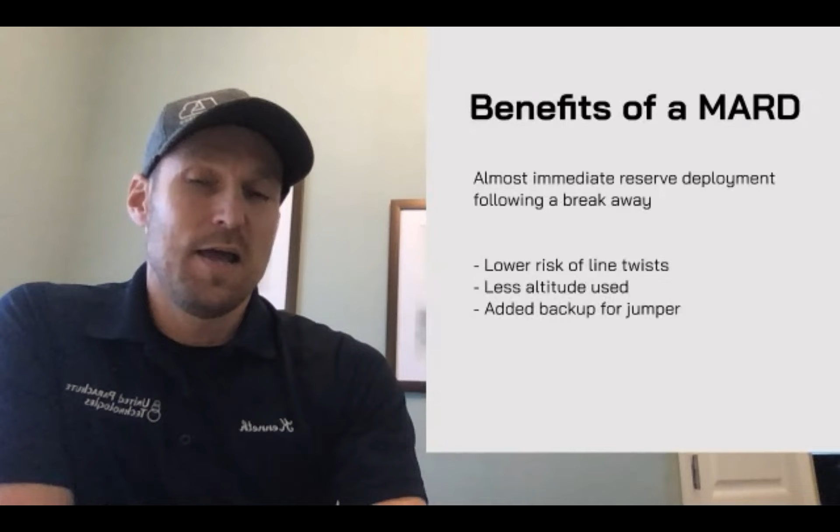With the TSO certification that we use within the FAA in the US, like I mentioned before, we have about 3 seconds or 300 feet to get that reserve out. And that's in any given situation. That can be from a terminal ride, or that can be from after a breakaway. With the MARD system, it has been shown that we're reducing this down to less than a second and less than 100 feet. Now that's a lot of give on a situation like this. It can be a massive difference.

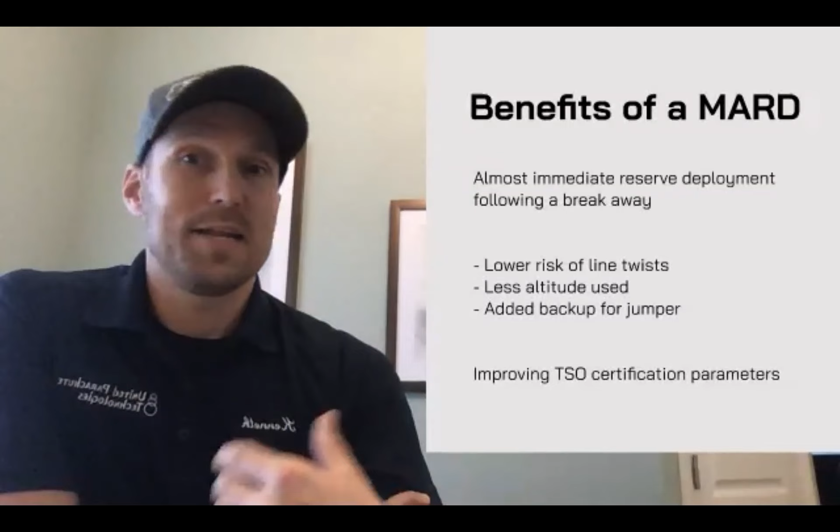Obviously, we always expect people to do their procedures, follow their altitudes. But if things get out of hand, we get a little bit of tunnel vision, we get a little bit low, that's going to make a big difference on the altitude.

The types of MARDs that are out there, there are quite a variety now. UPT introduced the very first MARD as part of the Sigma system back in 2003. The Sigma had been out on the market about 2 years before the Skyhook got introduced as a mandatory part of the system. Before that, there was a lot of development, and we'll get back to that in a second.

Now, there are other manufacturers out there that currently use the Skyhook itself. They're licensed by UPT to use the Skyhook. There are other manufacturers as well that have created their own designs and came out on the market. They have various names, and they're all great systems that have been thoroughly tested.

When we talk a little bit about MARDs on our end, we talk about passive and active MARDs. So a passive MARD would be something that is in your container, not actively put together from the main through the RSL to the bridle. So it can be something that attaches later, at any given time during the breakaway and emergency procedure process. Active MARDs are the ones that are already attached, where it will almost be the opposite. There would have to be a reaction to get it released again.

Now, the Skyhook is an active MARD. The Skyhook is put in and put together with the lanyard during the reserve packing. There are others that are not, where the bridle and the MARD system are completely independent. So the Skyhook itself, we have a picture of it here. That's kind of how the name came about. It's a small hook that's been sewn onto the reserve bridle.

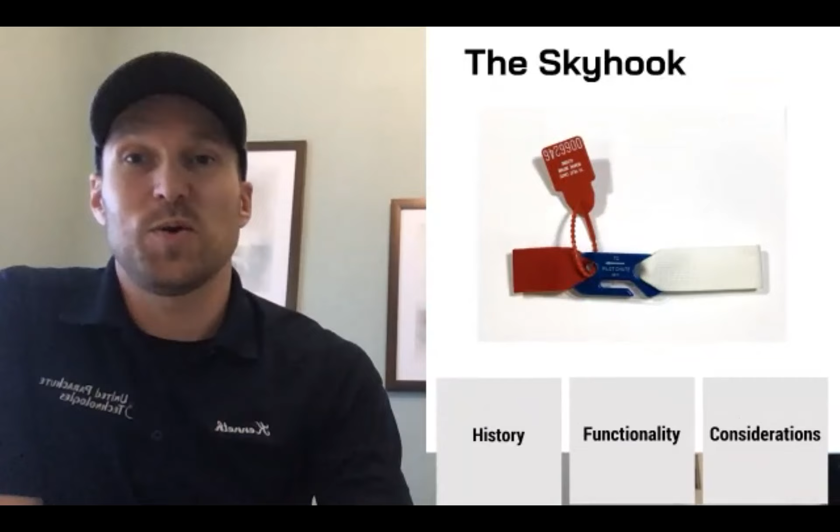It connects via a lanyard. We have a black lanyard that comes from the main parachute, a white lanyard down to the pin, and a red lanyard that goes to the Skyhook. That red lanyard is an interesting point we'll get back to a little later.

That is the connecting point that creates the MARD connection for the Skyhook. It was invented by Bill Booth. I said earlier that we introduced it around 2003, but it was something Bill worked on for many years before that, probably 15 to 20 years before it even came to fruition. There were a lot of obstacles to get over, a lot of challenges that had to be solved before he could really start putting this into a testing phase in the end of the 90s.

The biggest obstacle was solved by something we call the Collins lanyard principle, or the Collins lanyard concept, which in short ensures that if you ever have one riser leave before the other—whether from a failure or from misrigging—you never have half a canopy attached to your container and harness system with the MARD starting to activate.

The Skyhook itself was originally developed for the tandem systems, because during emergency procedures for tandem systems we would see instructors using more time than on sport container systems. We allow a little bit more because it's a heavier, bigger system. We have up to about 5 seconds before we have to have a reserve out.

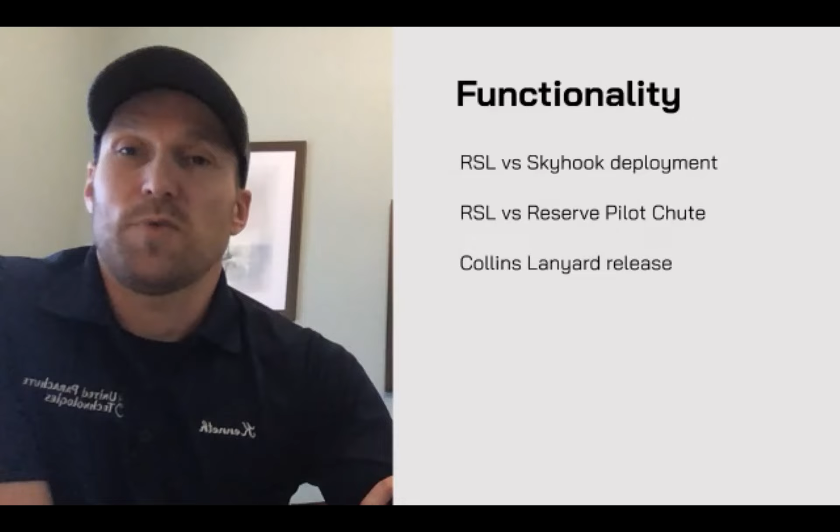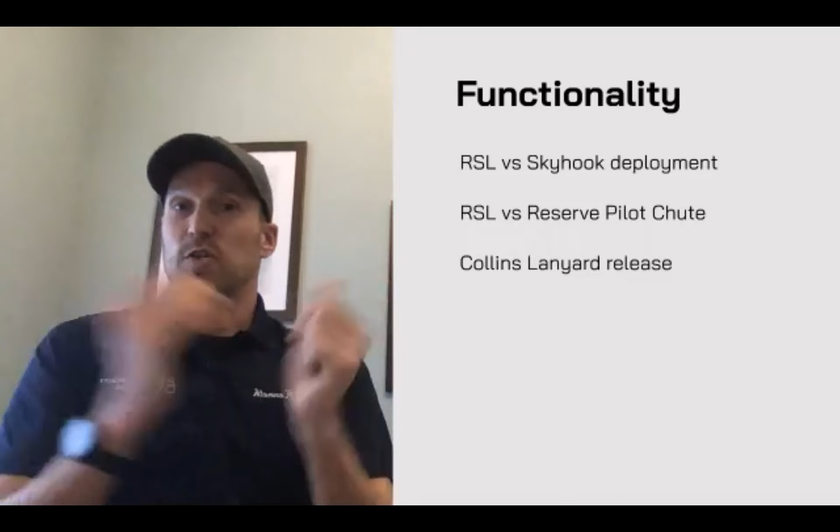So to solve this issue, to solve this problem, the Collins lanyard was developed. It is a small connection on the RSL lanyard itself, where the breakaway cable to the opposite riser routes through. So that means if the RSL side, for whatever reason, breaks—any type of failure, misrigging or so, maybe a pull on incorrectly adjusted breakaway cables—if that releases, the non-RSL side will also release. It'll be illustrated here in this video.

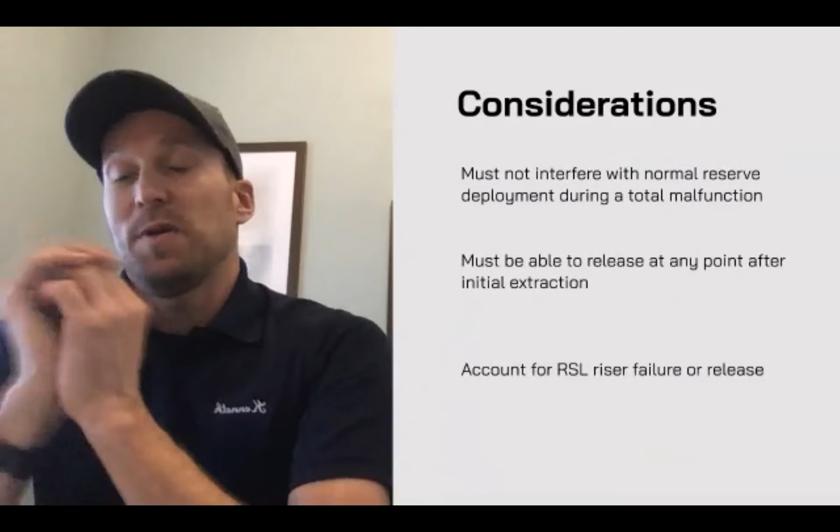Then we're going to talk a little bit about the considerations, because obviously any idea is great. If we have a new development that we want to pursue, you have to take into account all the considerations—what about this situation? What about this situation? What about this situation?

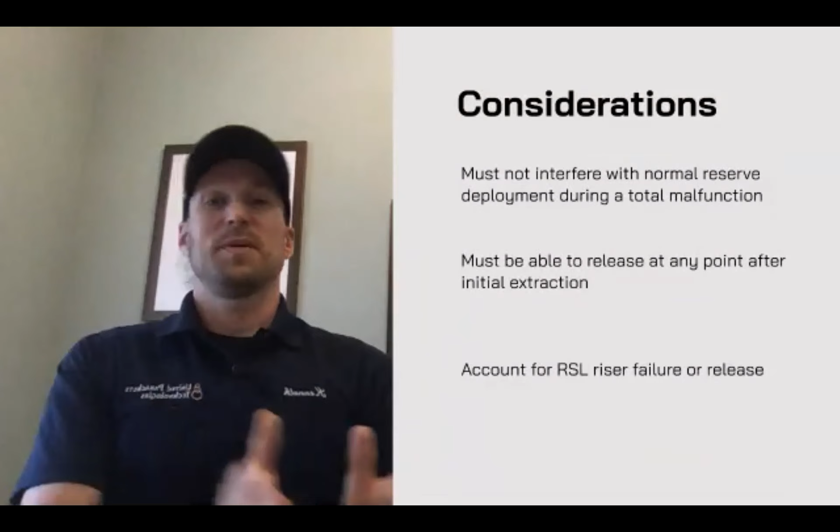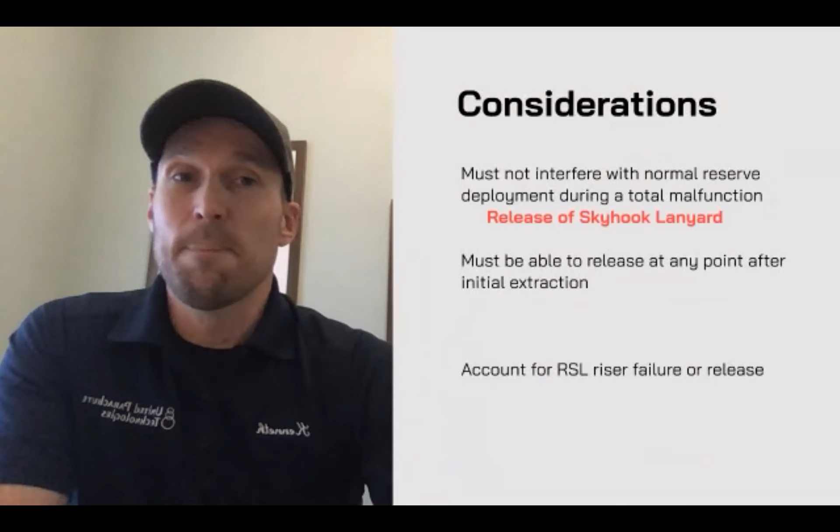So what we have is, we don't want the Skyhook to interfere with any normal reserve deployment during a total malfunction. Well, that's what we just illustrated—we had the release of the Skyhook lanyard in case the pilot chute starts pulling on a total malfunction. It'll simply just sit back in the container. The lanyard will still be in the container, and so will the main risers, because we have a total.

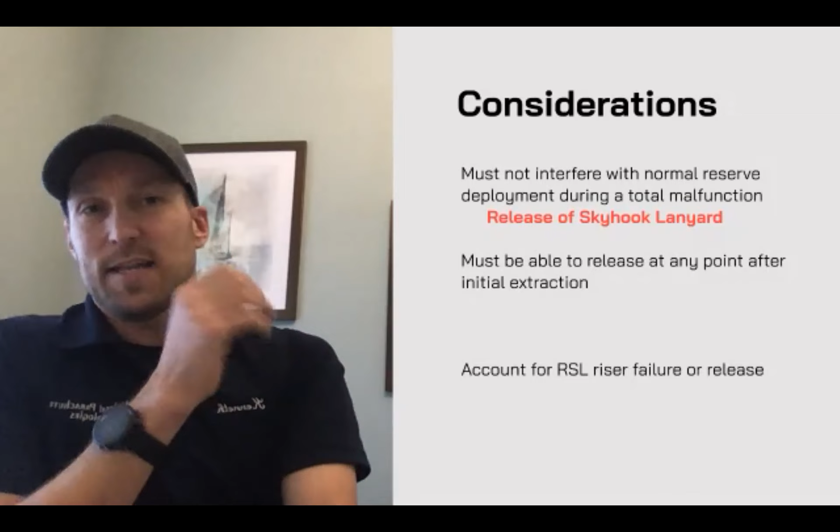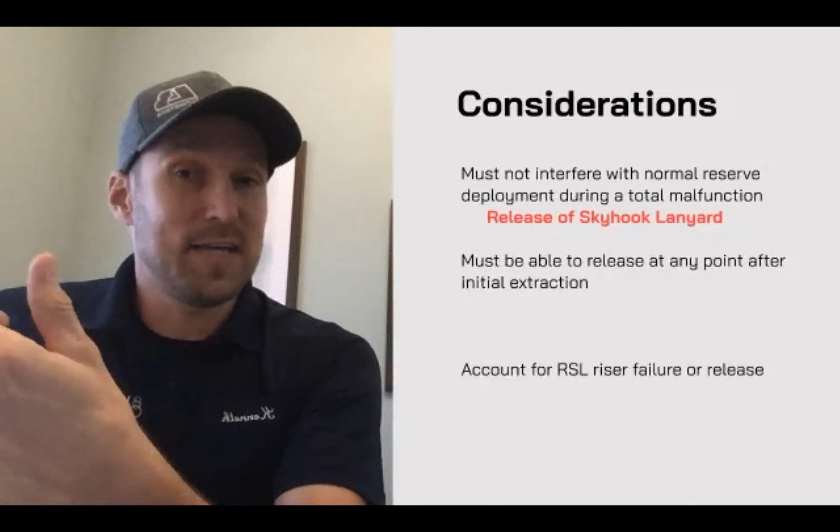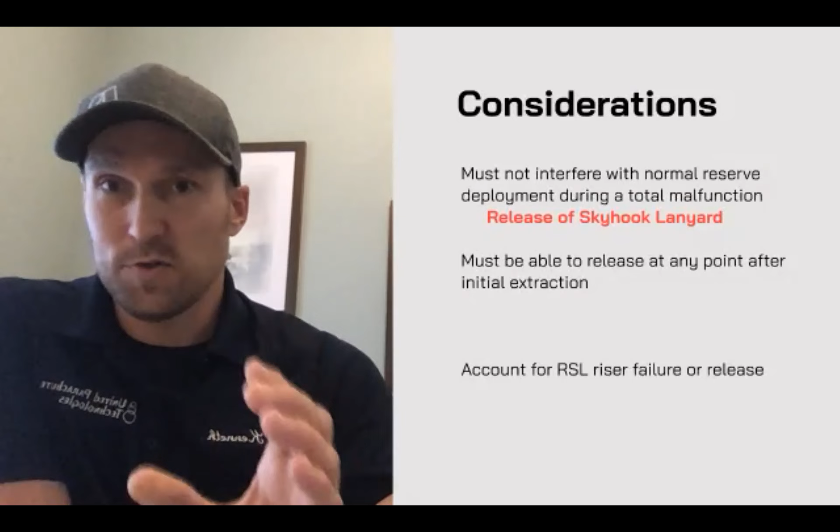Then it also needs to be able to release at any point after the initial extraction. Reason being, we don't know what happens after you break away—what if there's a misrouting or something, what if you're tumbling at the time through your lines? It could be that we have a partial canopy out, maybe even a bag-lock that doesn't create a lot of drag. A lot of things can happen up there. So we want to make sure that if at any point there's more force coming from the pilot chute itself, the reserve pilot chute takes over and continues extracting the reserve canopy.

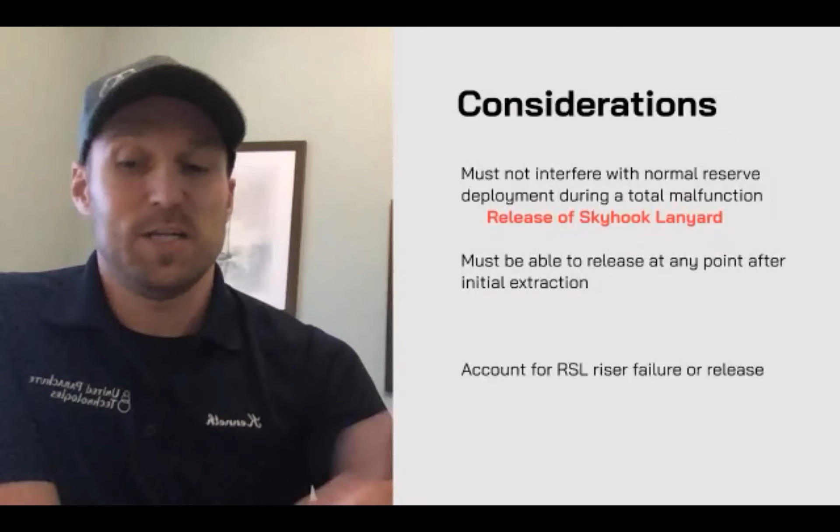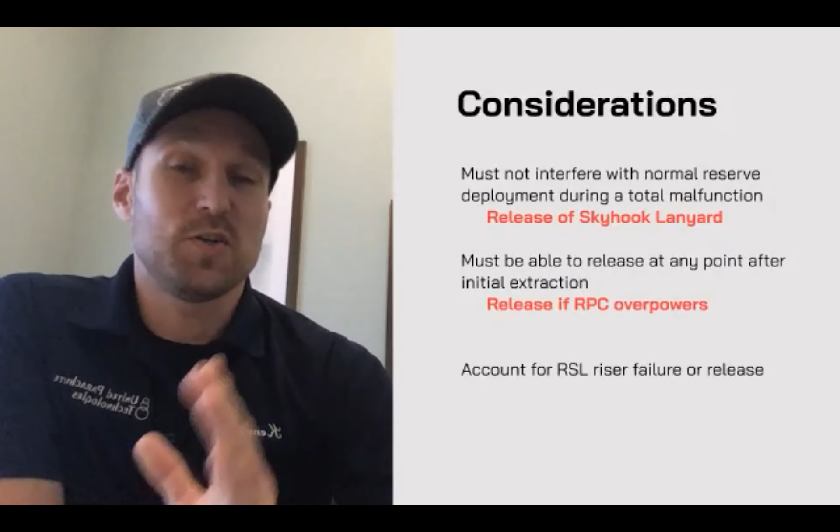We don't want the Skyhook, even after initial extraction, even after the initial load, to ever be a hindrance in that. That's what we saw as well when the lanyard slid off—that can happen at any point. Whichever side has the most power is going to continue deploying the reserve.

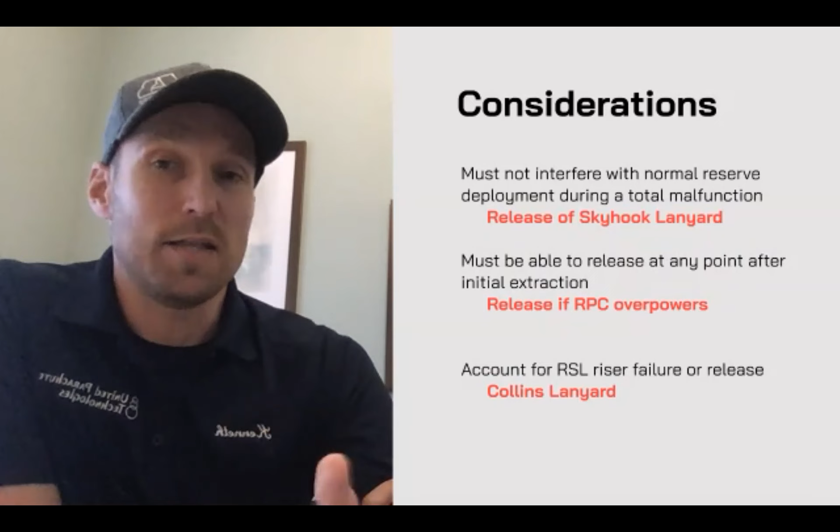Then we need to account for the RSL riser failures and releases, and that's what we just saw with the Collins lanyard—the Collins lanyard is solving that. That's what Bill was really fiddling with for a long time, and we had an engineer named Collins that basically came up with this, and he was fortunate enough to get it named after him.

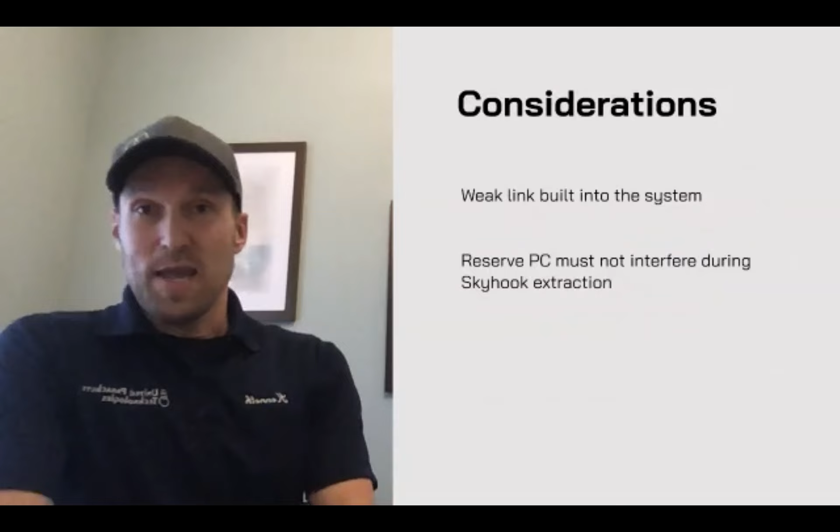Then we also need to make sure that we have a weak link built into the system. Again, if we have a horseshoe malfunction, or if the slight chance happens that we have, say, a bag-lock—so we have no canopy out, nothing to really slow us down, we're going full terminal speed—we do our emergency procedures, and right as we have broken away, that canopy comes out of the bag.

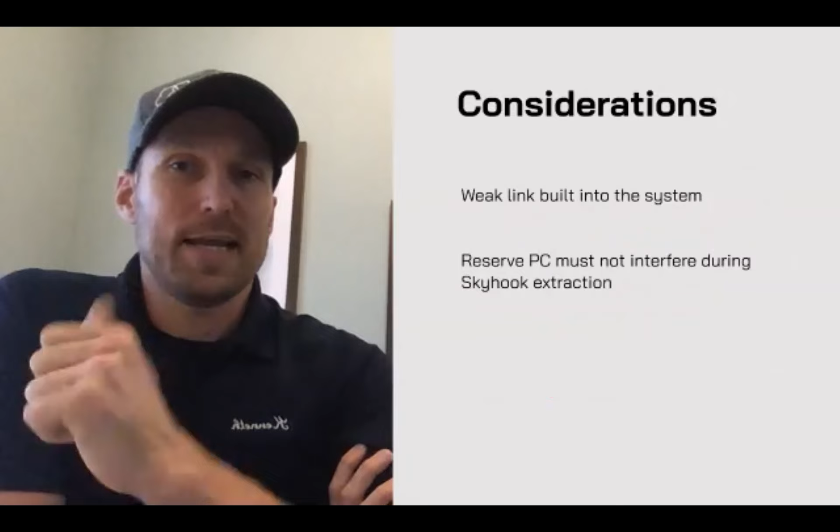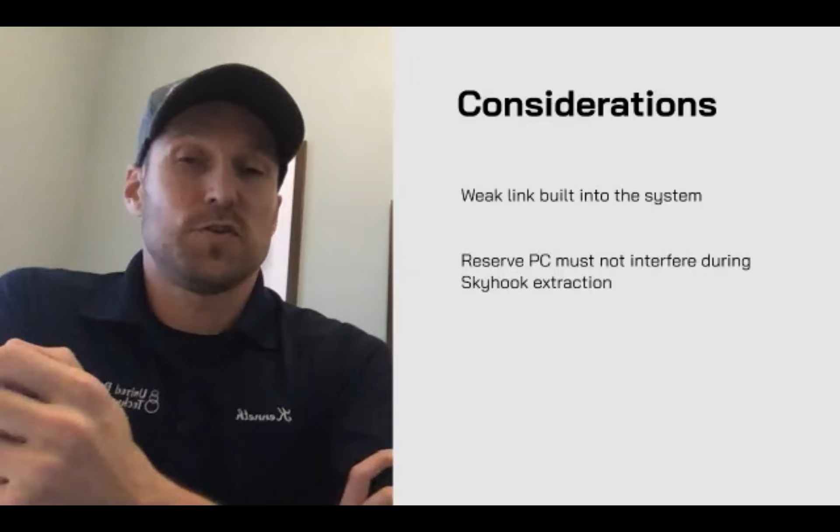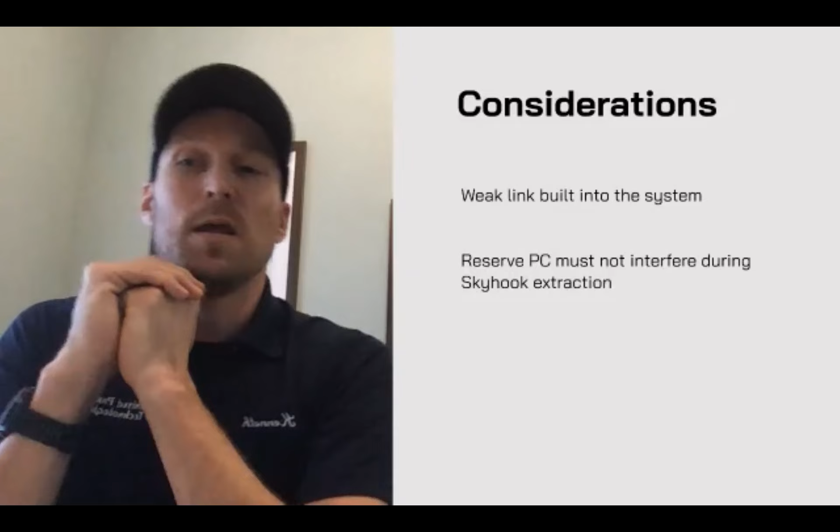Now, the main is going to transfer the opening shock through the MARD system onto the connection, essentially whipping out the reserve bag. We don't want to risk that, because even with the current designs, if the safety stow fails, or if the safety stow slides off because there's so much force on there, then we could essentially leave the canopy bag in the container. We don't want to risk that.

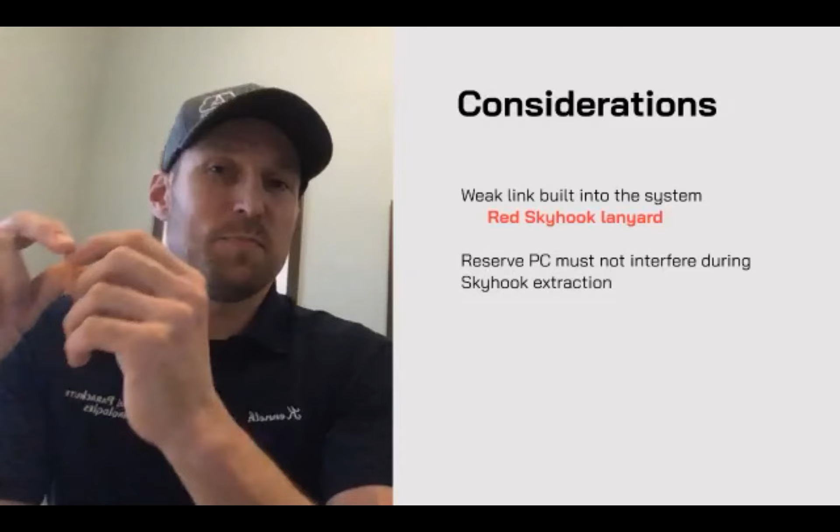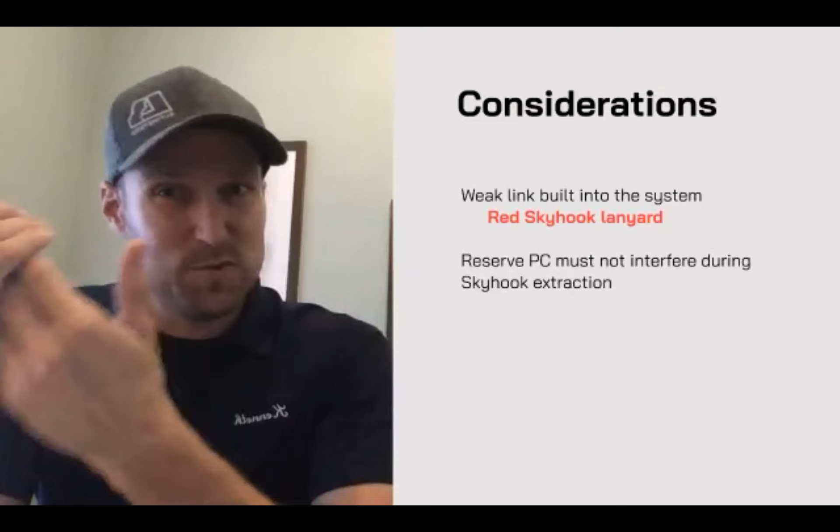So there's a weak link built into the system, and that is the red Skyhook lanyard. It's made out of a specific material that fails around 250, 300 pounds. That's not a lot when you think about opening shocks—that's actually a fairly low one. So that's why we've seen red Skyhook lanyards that would break, and that is per design. If they get overloaded, they can break.

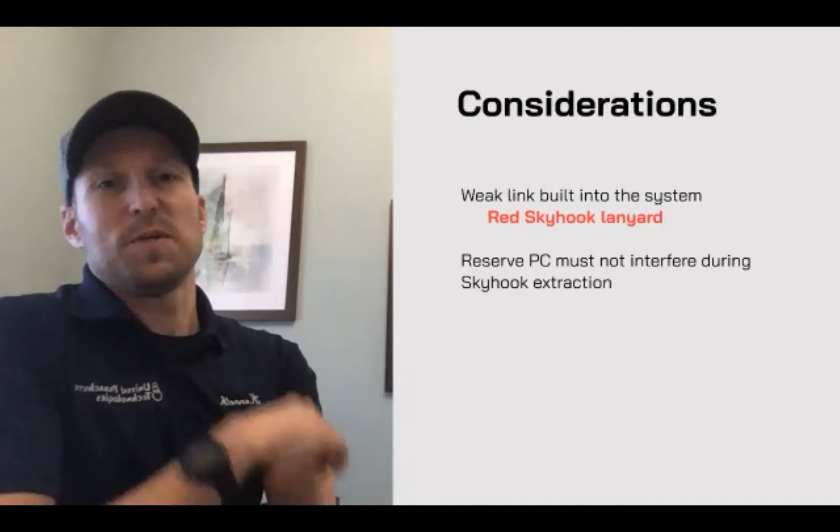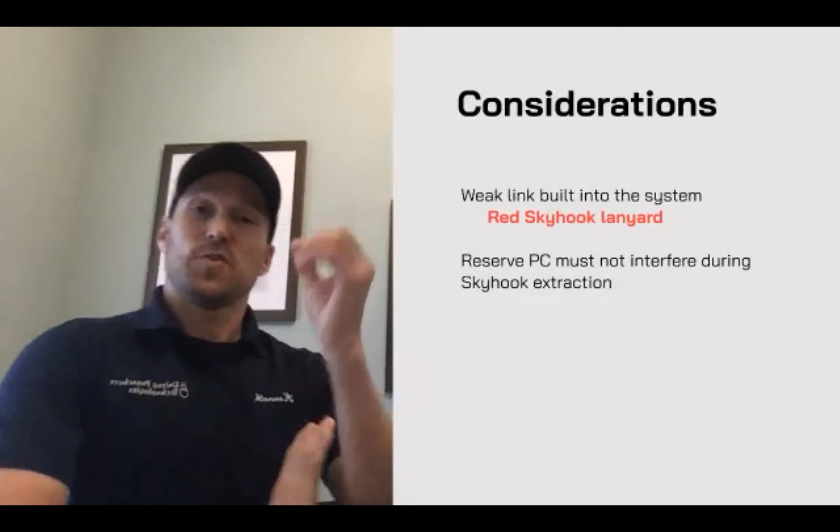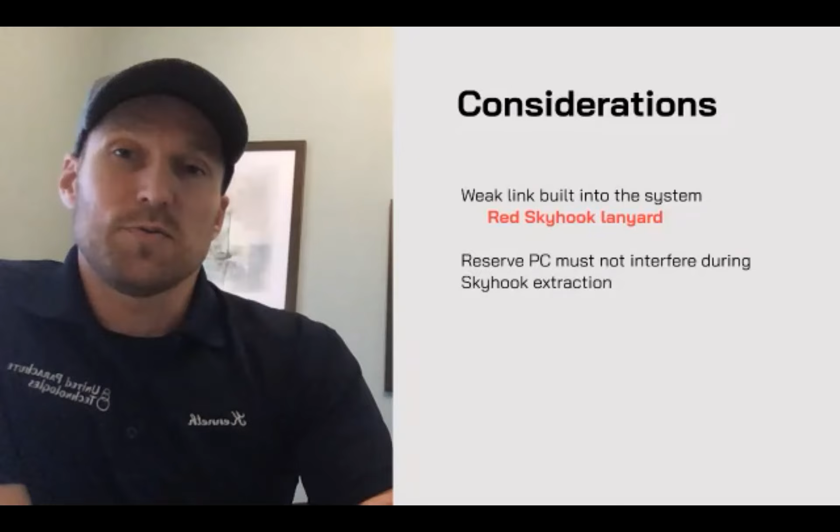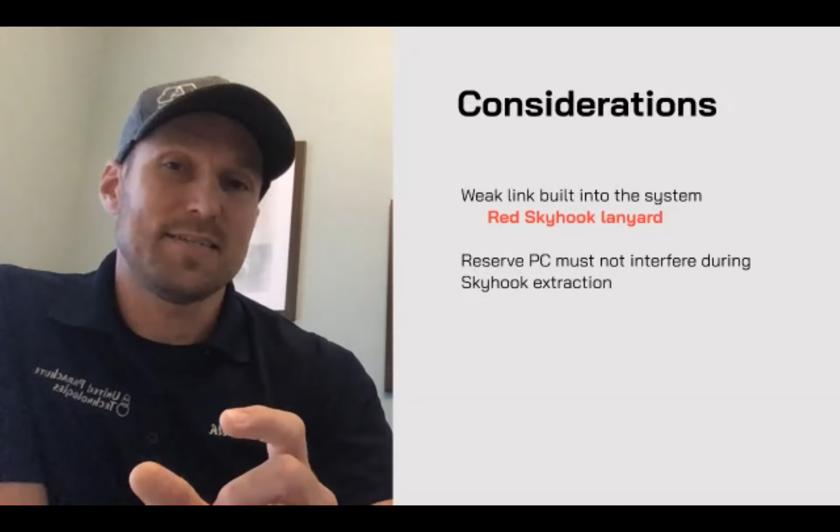The last thing we have is we don't want the reserve pilot chute to interfere during the Skyhook extraction of the reserve and the deployment of that reserve. Meaning that as soon as the Skyhook loads up and pulls away, as we saw in the first video, we don't want the pilot chute now trailing down, looping around and catching onto the reserve. The only simple way of solving that is positioning on the bridle. The distance from the Skyhook onto the pilot chute is less than the distance from the Skyhook onto the bag. That means the pilot chute can't loop down and around and catch the bag. So that's solved with the placement on the bridle.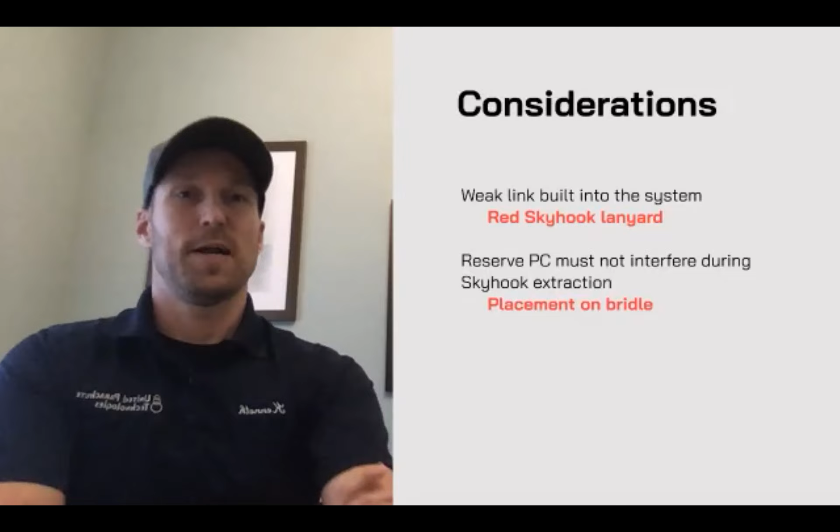Then we got to go a little bit into some of the rumors and facts, because obviously, especially in today's world with the internet, there's a lot of opinions, a lot of thoughts, and a lot of assumptions going on. So we always encourage people to contact us. We'll always provide an answer, and try the hardest to give an answer on any questions that might be out there. Some might be directly related to proprietary information, so we can't disclose that, but we'll try explaining something. You're always welcome to contact us.

Some of the most common ones: if I have a MARD, I can pull lower, because if I ever have a malfunction, it is going to save the day. Now, just having a MARD does not substitute for any type of proper altitude awareness or procedures to be used, okay? You want it the day when everything else goes wrong and you need that little bit extra altitude. You don't want to push, you don't want to start sucking that up every time you jump.

Another thing we hear sometimes is, I don't need to have my RSL attached anymore because I have a MARD in the system. I don't want to have my shackle on just in case it gets windy. Well, since the MARD is a continuation of the RSL, if you disconnect your shackle on any part of your container system, removing the connection from your main to your RSL, you have also, in effect, disconnected the Skyhook itself, or any type of MARD. So that's also important to keep in mind.

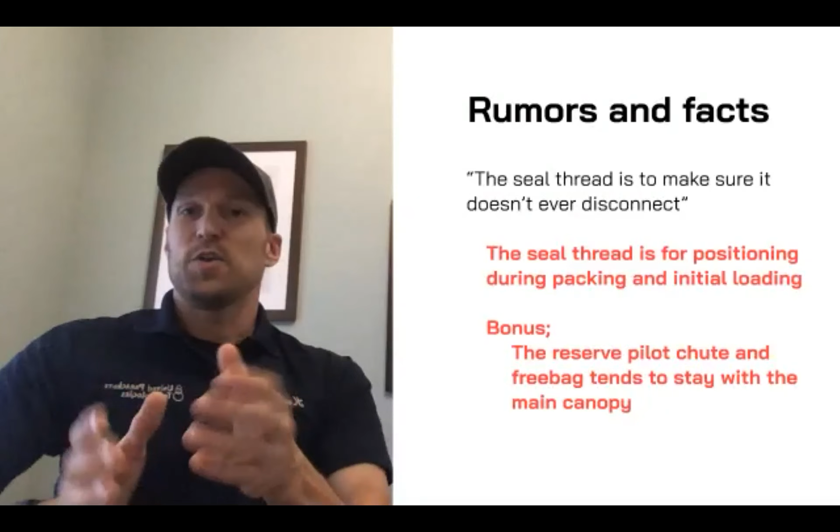Then we have the seal thread, which is to make sure it doesn't ever disconnect. For the riggers out there, when this is being packed and the lanyard is put onto the Skyhook, they tie a single round of seal thread around onto the Skyhook. That's simply to keep the lanyard in place during the packing when it moves around, and during that initial load. Like I said in the video, we saw it go one direction—if it starts going in another direction, it's just to keep it in place until it loads up on the Skyhook.

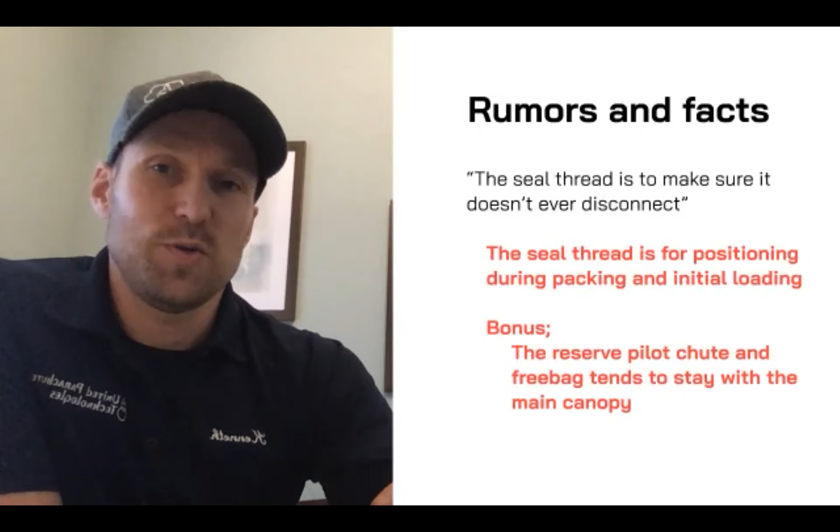Now, the upside to that is that most of the times when we have a Skyhook deployment, the reserve pilot chute and the freebag tend to stay attached to the lanyard and go down with the main. So if you find the main, you tend to find the reserve freebag and the reserve pilot chute, or the other way around.

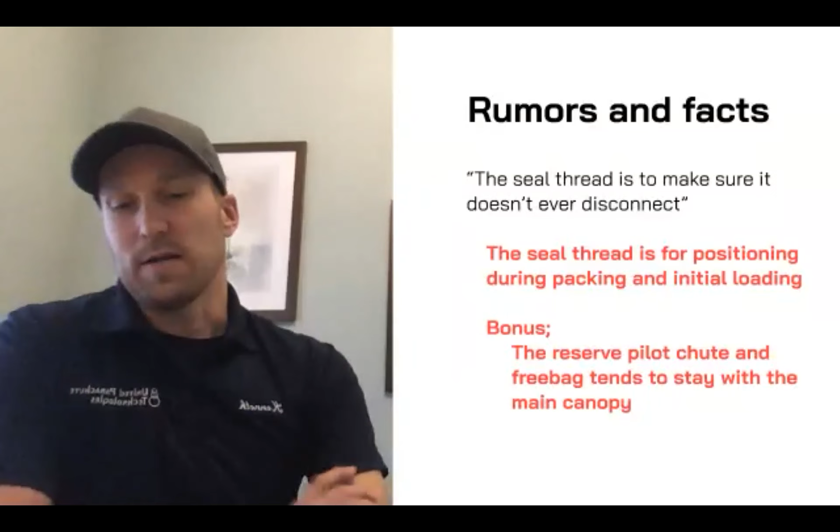The Collins lanyard is yellow. Now that's something that has happened in recent years, because in 2009 we introduced the yellow split lanyard. That was an optional installation. It wasn't mandatory. You can have a Skyhook without having the yellow Collins lanyard on there.

We highly recommend it on RSLs simply due to the nature of it, but we do require it on Skyhook equipped containers. So it's mandatory on Skyhook equipped containers.

So it's actually an alternative factor. Well, alternative facts. Yeah, you can call it that.

And then my last favorite one, and this is an actual inquiry we had: How long does the battery last on your Skyhook? Well, as far as I know, we don't have any electronic MARDs out there. So all of them are non-electronic. They might need some maintenance over the years. It depends on the manufacturer.

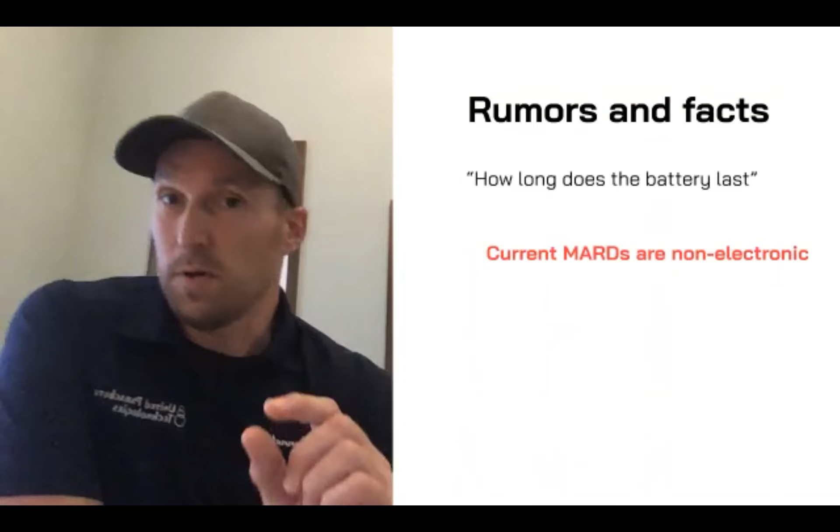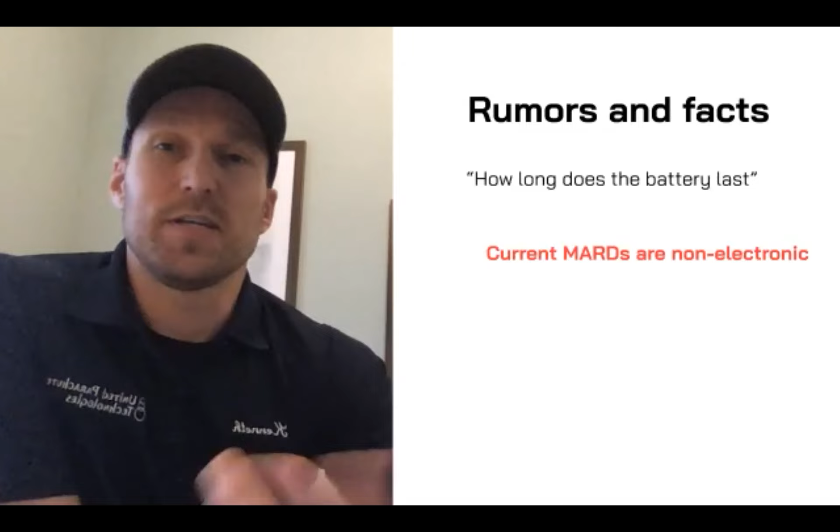Currently, the Skyhook does not need any particular maintenance. Now, the little plastics that hold the lanyard in place, as riggers know, can crack over time from use, packing, etc. And we can replace those easily. We can send those out to riggers, no problem.

All right, that kind of covers everything that I wanted to cover tonight. It was a quick little run through it. There's a lot of things to discuss when it comes down to MARDs. Hopefully I covered most of these.